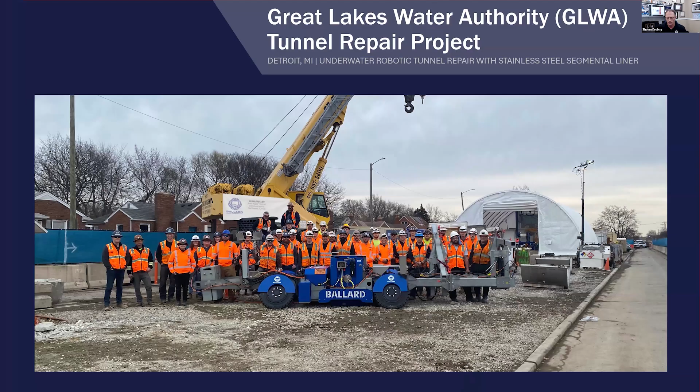So, moving on, this is a picture of the project itself. I'll get into the project a little bit, but just from this picture, you can see the team of divers it takes to run it. The project is actually in Detroit. We did most of it from the median, about 34 feet dimension from curb to curb, and that's where the pipeline runs. This is the team that helped develop BERT and ran it for the very first time.

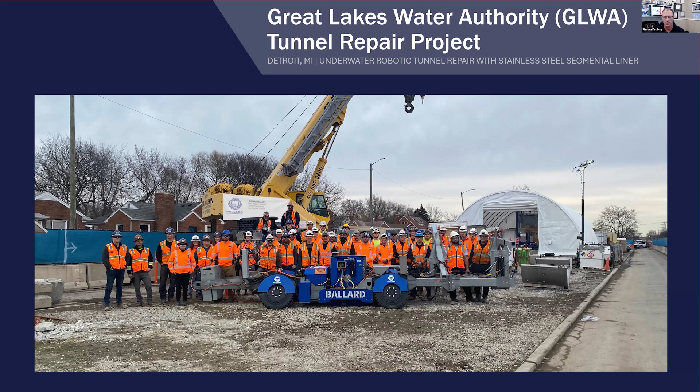Very extensive divers, and their experience is amazing. Working with them through the R&D process, they helped us develop the vehicle, as they would be the ones working with it.

So let's get into the why. The aging infrastructure in the United States is something everyone's aware of. A lot of these things, like the tunnels we're going to talk about today, were built back in the 30s and the 50s. Some of these are seeing complications and challenges, maybe not as bad as the picture on the left, but again, it's how do you fix those things, and how do you do that in a situation where you may not be able to shut it off or bypass it easily.

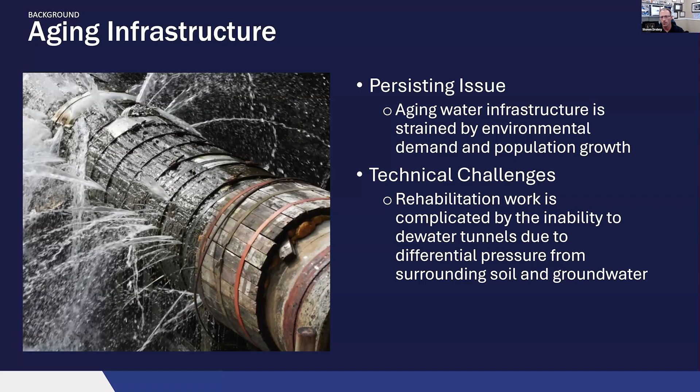That's kind of what this project, how it came about. If you know Detroit, looking to the north, there were actually 3 tunnels in the system that we worked on for this contract. Our designers were Brierley and Schnabel - Schnabel was more on the liner design, Brierley the overall project. There were 3 tunnels; 2 of them got liners, and we did grout injection for crack injection in one of the larger tunnels. That's a little over $90 million, and we're currently in the last year of it.

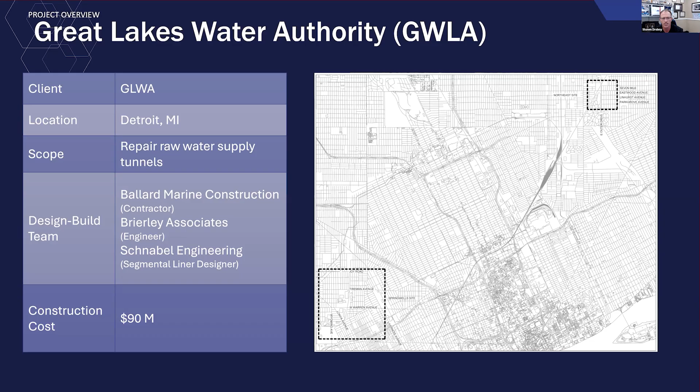So the inspection - how did we get to this project? We first got out there for the inspections. We used divers in 2015, and in 2018 we used divers as well as ROVs to do a full inspection of the whole system, which is in excess of 10 miles for each tunnel. In certain instances we used ROVs, in some instances we used divers. Some of these divers were penetrating over 2,700 feet to do the inspections and gather the data to see what was wrong with the tunnel.

The first tunnel, 12-foot diameter, was built in the 1930s - unreinforced concrete, cast in place, in soft clays that hover just above the hard pan. The second was built in the 1950s, same soils, about 95 feet down, which presented a definite challenge.

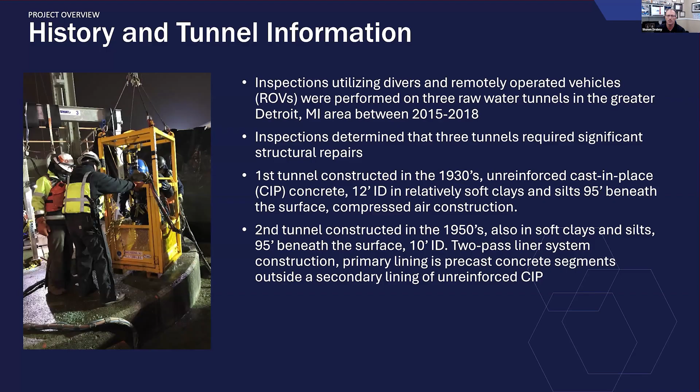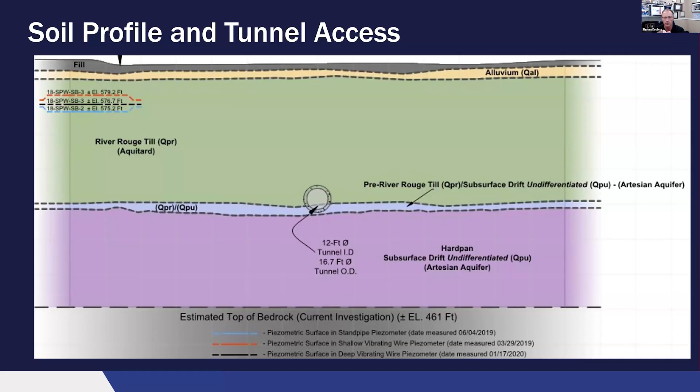Here's a quick view of where the tunnel lies. In profile, it hovers around the hard pan, and this led to a lot of the cracking in the tunnel - that variance in the soils. This is between the River Rouge Till and the hard pan, which is kind of where the tunnel hovers as it goes.

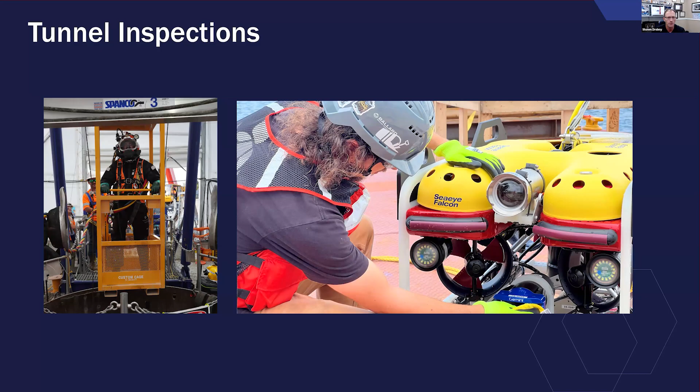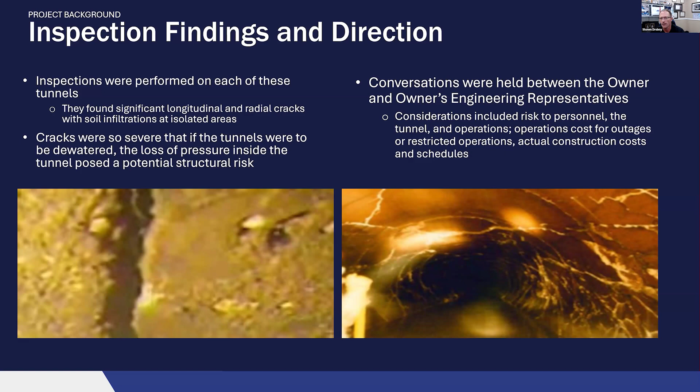The goal for the owner was to allow this tunnel to be dewatered so that traditional repairs could be made. But with this inspection, the fear of dewatering leading to a collapse possibility - they tried to dewater it, but there was too much infiltration or just a pure structural problem with the tunnel itself. That goes back to safety - risk to personnel and the tunnel itself. The entity could not afford to lose a tunnel, since this supplies a majority of the water for the entire Detroit area. You can't take it out of commission because the capacities required are too much, and the fear of collapse is too much.

So what does that bring us to? That brings us to how do we get in there to do these repairs in the areas where the cracking is really bad that we wanted to repair. We sat down with the owner - could we bypass the tunnel? You see the picture above with the pumps, but that wasn't feasible given the capacity of these large tunnels. The pumping requirements would be too much and too costly.

Our proposal was the wet repair—that's eventually what we went with, what we talked the owner into. Coming from the trenchless construction group and the tunneling group, we know the cost of putting in new tunnels, and they weren't too interested in jumping into that market of spending that kind of money to replace these two tunnels. So that's what led to working in the wet, not taking it out of service, and making these repairs in the wet.

We looked at traditional liner plates, galvanized liner plates. Obviously they're light and easy to move, but high bolt count. This is very problematic in the marine diving world because we had limited time as a diver. Depending on how hard they were pumping, the depth of water can range up to 65 feet, which only allows a diver in the water about a little less than 2 hours on nitrox gas. So every bolt counts with the time it would take. In the end, the traditional liner plates would not work because of the design requirement I'll get into in a minute.

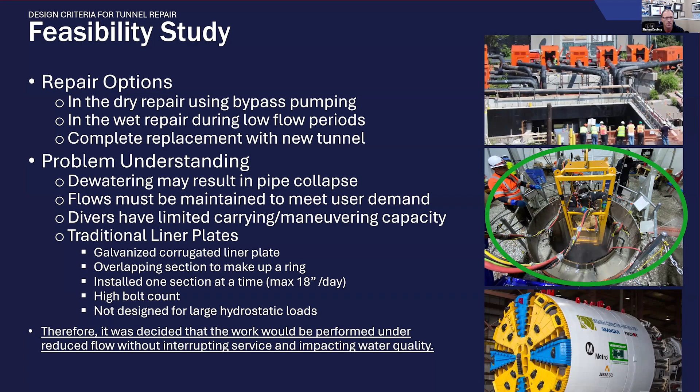The repair was, call it, a structural solution. The liners had to withstand 95 feet of hydrostatic head and a 50-year design life, using 304 stainless steel. When we get into the liners, you'll see this is millions of dollars in custom stainless steel liners that would need to last that 50 years. I have a slide later where we talk about how you do quality control in an environment where you can't send your field engineer down to do it.

The best thing was, we didn't want to take their hydraulic section down. So we went through a lot of iterations of what these tunnel liners would look like, trying to keep that to a very small footprint yet give us enough room for installation. We developed this with a mix of engineers, managers, divers, fabricators—everyone on the R&D team—to come up with both the liners and the vehicle.

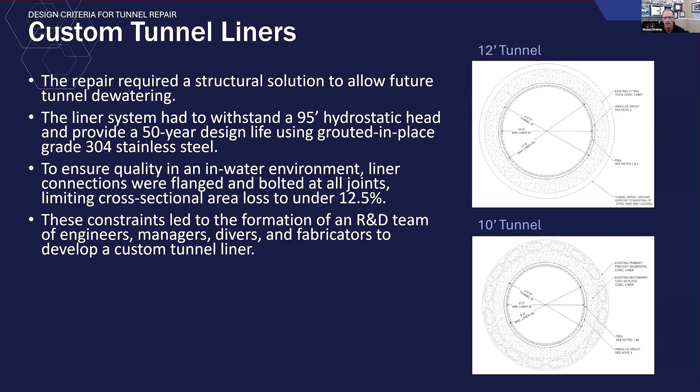The designer did FEM analysis on the tunnel, both the penetration and the liner section. The picture on the right shows the connection between the liner plates and the access shaft—pretty complex stainless steel welding and fabrication there, with the small liners. That's really what they were checking with the analysis, making sure we understood how loads transfer through the liners. That's what the designers were doing.

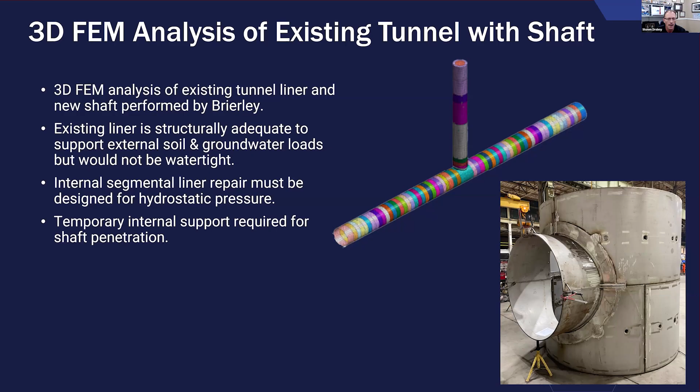So how do you do this? The pipes total 1,200 feet in length. One tunnel was a 500 foot repair, and the other was a 755 foot repair—two different sites. The problem was that those repair sections weren't close to an existing access point.

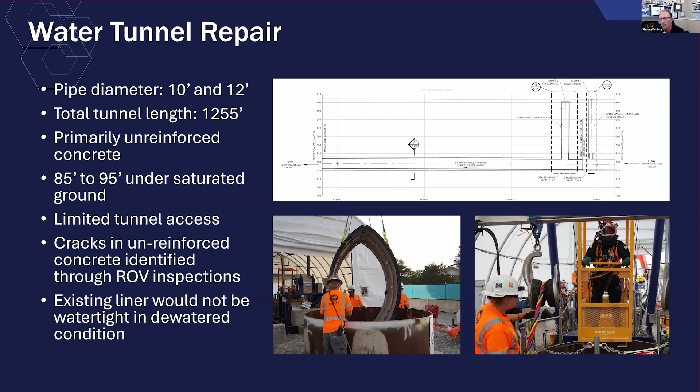So how do we get the tunnel liners down there, and how do we get the diver down there safely? We had to install and drill into the existing tunnel at a location so we could service the work effectively. If the divers had to penetrate 1,800 feet or whatever it was to reach the repair section, they'd have limited time for the actual repair. So it was decided we would tap into the tunnels, which had been done before, but it's a risky part of the project. It was required that the divers have their own smaller access shaft, and a larger access shaft just for materials and the vehicle itself.

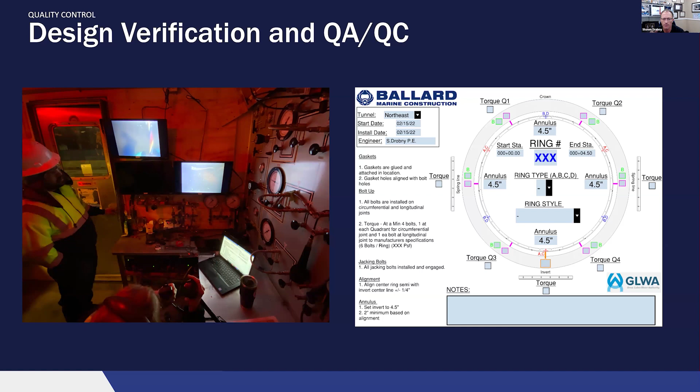I slipped this in for quality control—if you're not familiar with the diving world, the field engineers sit in dive control going through this with the diver, taking pictures, using video communications, and a checklist for every single liner plate we installed: the gaps, the annulus measurements at different locations, the bolt count, and the torque requirement on all the bolts. This is the QC sheet we used to verify quality control was being done and assure the owner that it was happening.

So let's get into the project. This is kind of the riskier part, and something that piqued my interest was how do we get into the tunnel and how did we do it?

Then basically the last part of it was diver access. We were able to get the divers in. We came up with a digging shield, kind of like any kind of shoring. The last 5 to 8 feet or so was hand excavated by the divers, and as they did that, the shield would follow the casing until they reached the top of the tunnel, giving them protection from the outside.

Once we cleaned that entire thing off, we poured a leveling slab that followed the crown but leveled it up so the drilling contractor would have a nice flat place to start coring. We put a form up, cast that, and tied it into the casing itself, making a very good, strong connection between the casing and that concrete seal pour. That basically created a template for the driller to land his core barrel inside and then core through the tunnel.

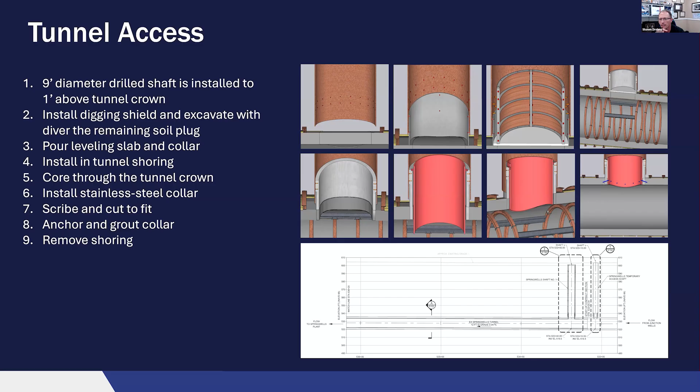Then to transfer the loads through it, we put down a 1.5 inch stainless steel collar. You can see it has tabs where it was able to land on that concrete, and then we had the diver scribe it, pull it back out, and cut it to fit. Once we did that, we had pre-placed bevel washers on all the sides where we were able to anchor that into the actual tunnel crown. Then we grouted the annulus between that, and that was a good structural connection, allowing us to remove the internal shoring and start the project.

Again, Brierley did the design on the liners. We started off, obviously, when you're using that kind of linear footage, every pound counts for every liner. So we actually started with a 3/4 inch skin because of the loading, but we were able to add some stiffeners. We used 3.5 inch by 1/2 inch angle as the flange connections, and so we were able to get that skin down to a more manageable, I think it was 1/4 inch, which definitely took our weight way down. But again, those are the custom liners made.

Now, if you're not familiar with stainless steel welding, you can get a lot of temperature variations when you're doing that. And obviously there was a lot of weld required because of the internal stiffeners and just making sure that was all tight.

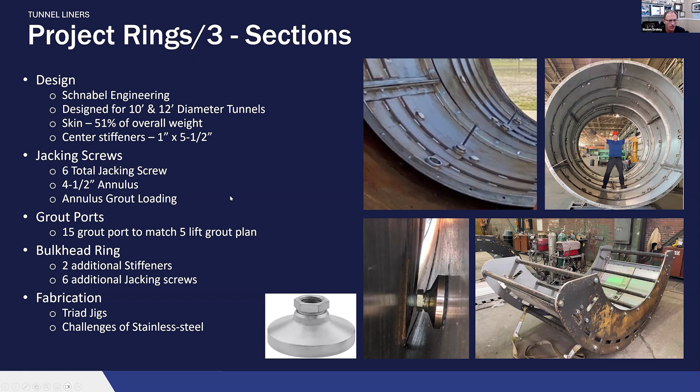So that was working with the fabricator, doing a lot of that stainless steel stuff. But I think the key to this project was the owner allowing us to do a mock-up.

We mocked this up for about 3 weeks. We used the divers, the dive supervisors, and the engineers, and we met for 3 weeks on how do we install these, how do we get with the access that we have, how do we get this done.

One of the key things that came out of that is what this picture shows, what we call the football method, which is actually part of our patent. That football comes down, it opens up, and then we add the third piece, and then we bolt those rings up. But this mock-up was key to finding out what the bolt sequence would be so that we weren't under suspended load, and having only 4.5 inches of room around the whole thing, having enough play to actually open up the ring and assemble it.

The mock-up was the key to our success in this project, developing not only the liner installation but the vehicle itself and figuring out how we were going to do it.

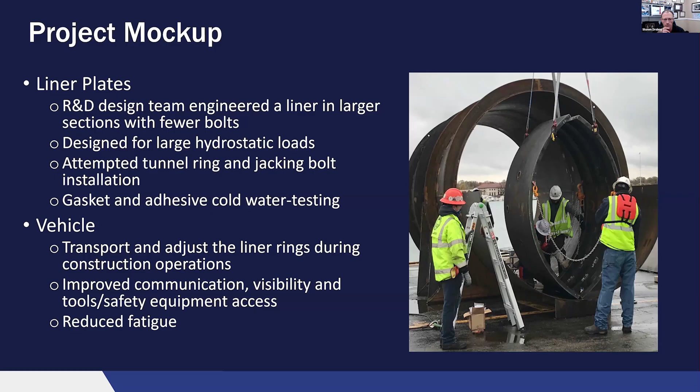So now we got the rings. We understand how heavy they're going to be, 4,000 pounds a piece. We wanted to get production, we wanted to get 2 rings. So how did we do that?

We put together, with the help of the Traylor Underground Division and Kelly Engineering, concepts that started with simple ideas. They went from simple to a lot more complex, from simply putting on a roller system and rolling it down the tunnel, which gave you no stability and no ability to control the rings, but we thought we could get it down there.

Traditional methods of doing this were just putting lift bags underneath the liners and moving them by hand with divers, which is very time consuming and not very safe, and moving traditional liner plates versus something that's 4,000 pounds is significantly different, requiring a lot bigger lift bag. So this is kind of where we went with it.

So then we kind of said, hey, we got an ROV division of the company, and we worked with some overseas designers, and Kelly Engineered Equipment is who built BURT. But working on these first initial concepts, we said, hey, what if we powered the vehicle? What if we went from a cart, something that's just going to be moved by hand, to something that actually has a hydraulic unit on it that can move it hydraulically so that we don't have to crank it.

So we kind of started with some initial designs. And then as we worked our way through, it definitely started improving and got to a point where it was a very full design of what BURT is today.

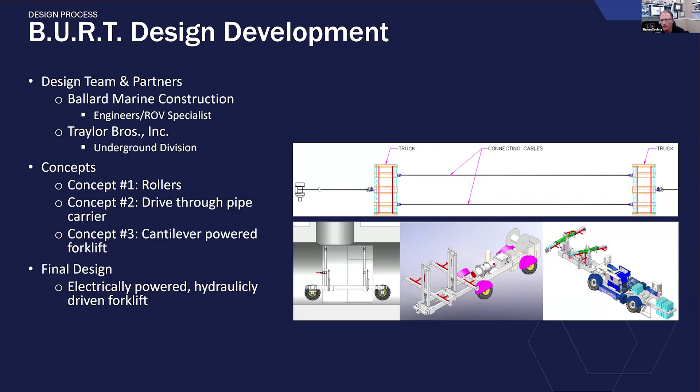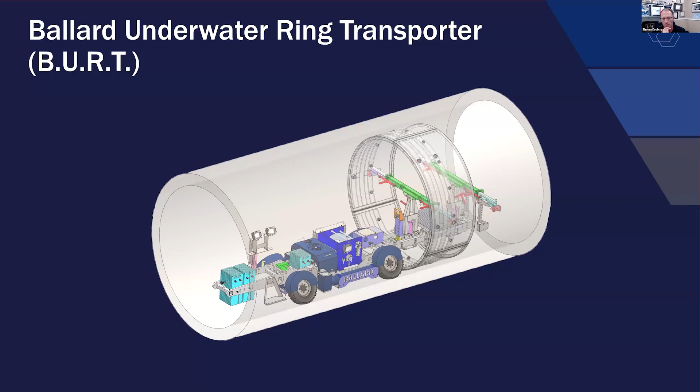So this is kind of what it looks like in the tunnel. You can kind of see the liner. This is how the vehicle attaches to the rings, using those same jacking ports. It can actually hold 2 rings at a time, and it has the capacity with the counterweights on it to cantilever 2 rings at a time, which is about 9,000 pounds. So this is kind of what the vehicle looks like. You can see the taper to the wheels to fit the tunnel and run in it.

So let's get into the details of what happened in the end, when we found that we were developing a new technology, and that this could be something huge for the company moving forward. We started early on in the patent process, and if you've never been through this, it takes way longer than you would think. But again, looking through what was already out there, we were in a league of our own as far as the patent itself.

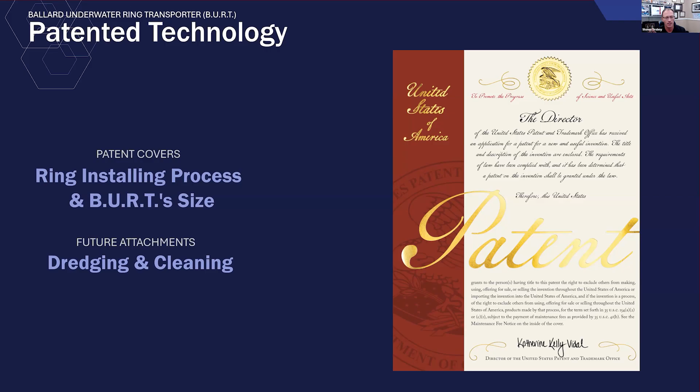So we were able to get a very broad patent on the vehicle, as well as the ring installation process itself. That led to the patent, which was pretty exciting. Our patent actually covers some future attachments that we haven't even created yet, as far as tunnel dredging and tunnel cleaning attachments, and we'll get into that as well.

So how does it work? BURT breaks down into 6 major components. We knew we weren't going to be able to get a 25-foot long vehicle down the tunnel like we wanted, not in one piece. So it breaks down into these big segments, and then basically it goes down. You put the main body first, you connect the tail section and the operator station, and then the arm sections and everything go down together. It can fit down a 7-foot diameter shaft relatively easily.

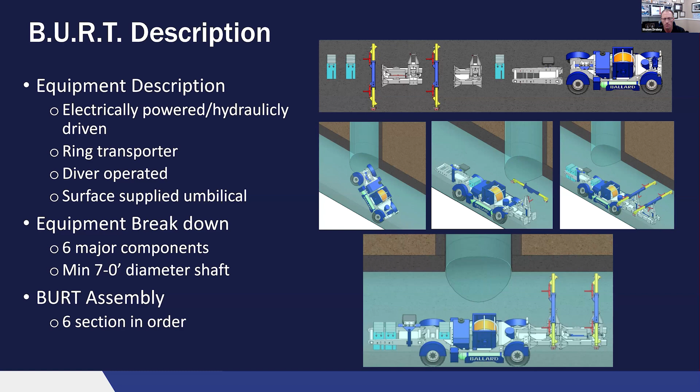When we first started designing this and going through it, we thought this process could take a week to assemble. And obviously the first couple of times it was quite extensive, but today, in year 3 or whatever of the project, we assemble this thing in a shift. It goes down, assembled, ready to go in a shift, which is about 9 hours, and it's fully ready to go. That changed our design too - we first started off with a lot of hydraulic quick disconnects so we could change stuff underwater. In the end, if we have a problem, we just take it out in the shift, repair it, and put it back the next day. That worked out really, really well.

One thing to consider when working in a tunnel is that the owner was not going to be able to shut off water necessarily, because of their water requirements. Our dive season is from October 1st to May 1st, give or take, because they're able to supply enough water and shut it down in maybe a 10-hour window at night, which is when we were working. But even then they would keep one pump on, so there'd definitely be flow in there - there is constantly flow. So we wanted to know what the situation would be. The divers, we don't like to see over 2 feet per second. It gets cumbersome to work in, and not safe.

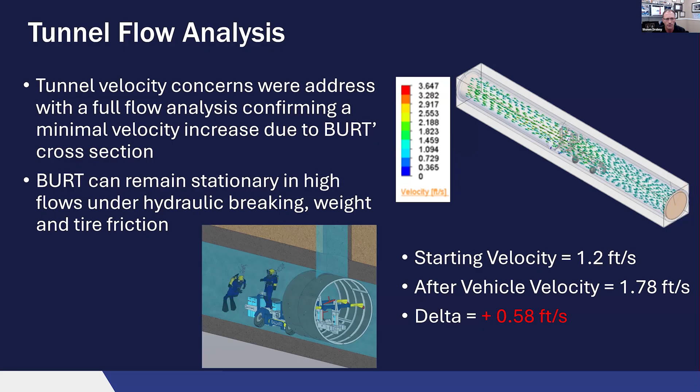So we did some flow analysis and figured out that it had a very minor delta and change, although it looked like it was taking up a lot of the cross section. We had a very small change in velocity through the liners because of the vehicle. Now, the divers will tell you that they definitely can feel the difference when they're inside the liners versus outside the liners before the vehicle. But again, it definitely is holding true to this flow analysis.

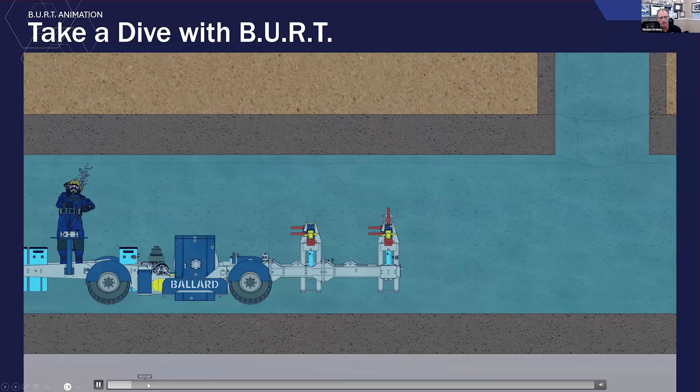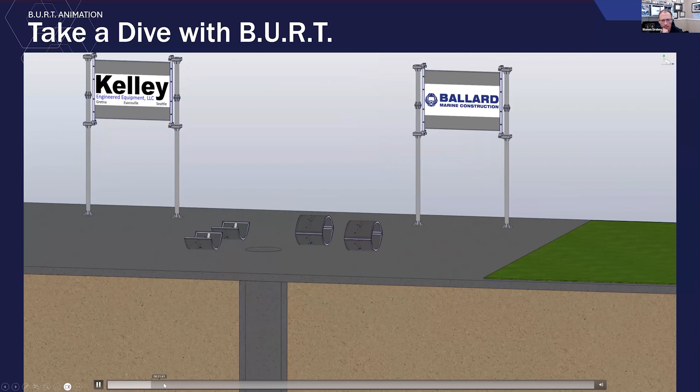This is kind of a video. It depicts the stages. It's kind of a long video, so I'm going to walk through the steps here. But again, this is the overall project. You've got your shaft. Our water head was about 65 feet. Essentially, the first thing to come down is actually the football section that's lowered down by the crane.

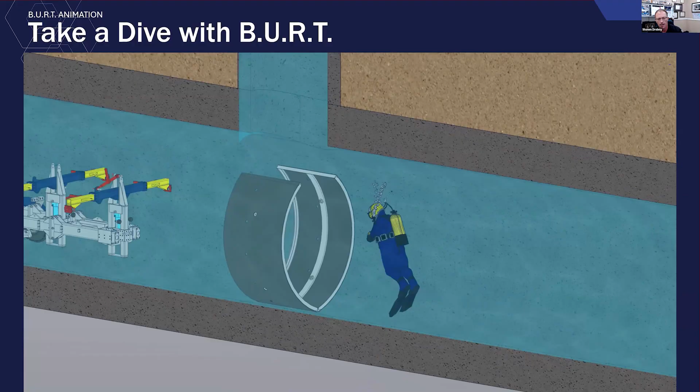And again, it's all about the rigging and how that works. And then it comes down and lands and then kind of opens up into what we call the football method. So it opens. Now you have room above you for the divers to work, but it kind of opens up.

And then again, we repeat the process with the third liner. The third liner does have to be landed and then re-rigged and then brought up into location. So it lands, the crane re-rigs, we bring it back up, and then we use come-alongs to bring it back together, land it, and we make those 4 initial outside bolts to make up the initial ring.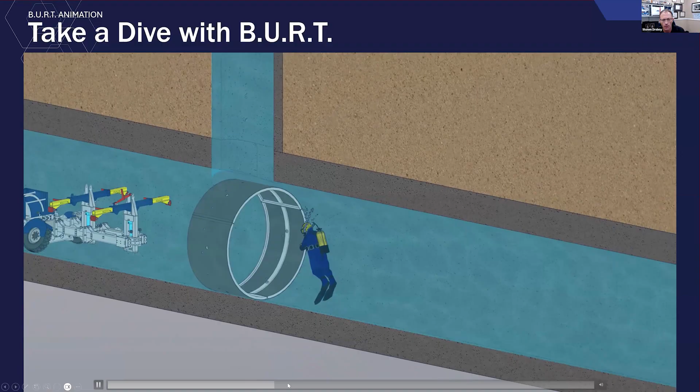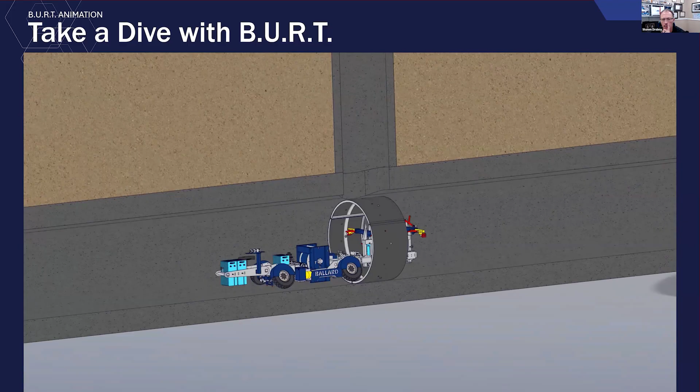And once that's done, the vehicle comes in and it actually goes to the first section, ring 1, and it will attach via those jacking bolts with those jacking inserts. And it basically attaches there. And those same 3/4 inch screws is what attaches the ring.

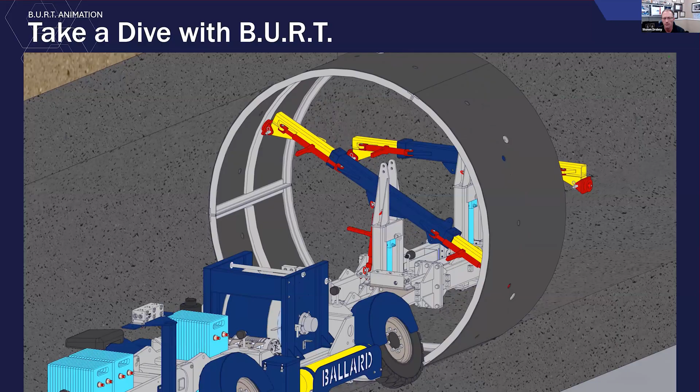Now, this first ring, because we wanted the joints to be opposite of each other, this first arm can rotate 60 degrees out and attaches and then spins the ring to a level position by keeping the ratchet attached and making the hydraulics able to rotate it just by coming up on it. And so it rotates it into position.

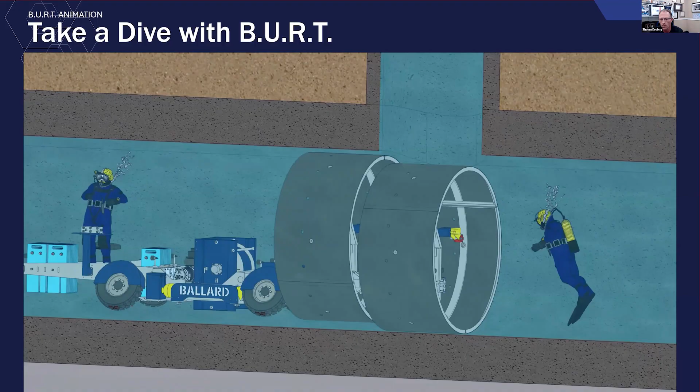The divers then drive the vehicle back and move it out of the way. This second section, the front section, can actually move, so you have separation between the rings. The same process happens, except for this one's on the normal. And so now you have an A ring and a B ring, and the joints are, like I said, 120 degrees separation, they said, for design strength and that type of thing.

So again, it raises, it again connects, it brings that together. That's the most time consuming thing, is doing the circumferential joint bolts and bolting all that up. But once that's complete, we now have 9 feet of completed ring that the divers basically drive the vehicle down and install it and work our way out. And so by using the vehicle, we're able to control that entire 9 feet up, down, left, right, until we mate it up, kind of like mating up a space shuttle.

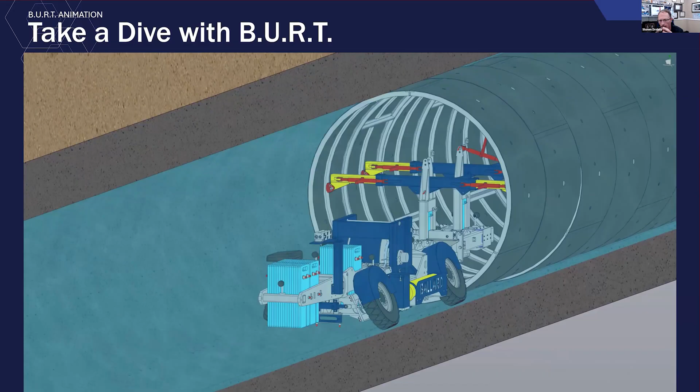You made up that joint, that flange, and then that bolts up, engage the jacking bolts, and that's kind of the sequence. You can kind of see the ratchets that bring it in and out. We wanted some fine control for that, as well as the rotation, so that we could see if it was binding up, and that's why we did not make that hydraulic. So that's kind of the process.

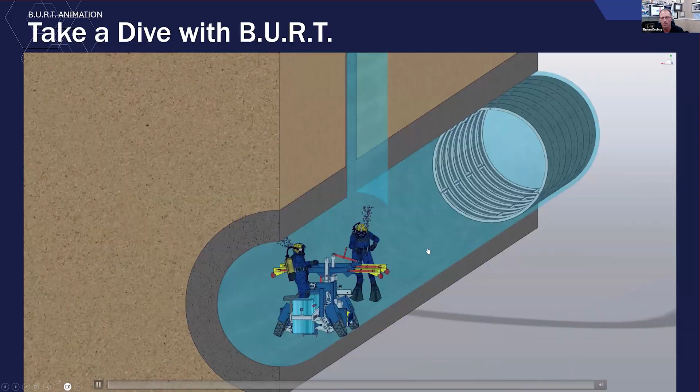So what are the controls? Basically, it can move up, forward, back. The divers have control of the reel that actually has the umbilical on it, and as well as we've added stuff now that we can control hydraulic stuff on the front of it, kind of like a skid steer. But again, that's kind of how it works.

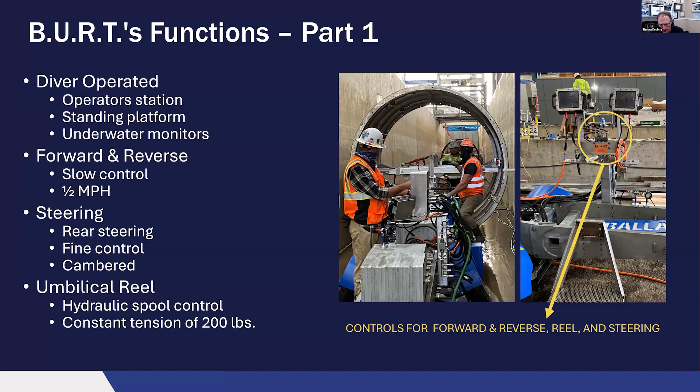It has rear steering like a forklift. Again, because the vehicle is 25 feet long, minor steering adjustments at the back is a big transition at the front. So again, we wanted very fine controls and be able to move very incrementally, especially coming up and matching up to the rings. That spool that's on the vehicle actually keeps a 200-pound tension on the umbilical, so it's always tight and always winding correctly, so you don't get any spidering or anything like that.

The heart of the vehicle itself is an underwater HPU unit. It's 480 volt, 3-phase, 900 volts out to the vehicle. It provides, we run it typically around 3,000 PSI, which is more than enough to control the vehicle. This came from a large ROV builder, deep sea ROV builder. Obviously, it's not a traditional HPU unit, as this is a completely sealed system, which definitely has its own benefits and downsides to it that we'll get into.

But the vehicle itself, fully intact, is about 20,000 pounds. So it's basically a tank. It was about a telehandler, you could say. So it's very heavy, but again, it has its four-wheel drive. Each of the drive motors, with 9,000 pounds of ring on it, something like that, this thing is almost unstoppable as far as its power. And although slow, it basically can creep along even in flow and current and stuff like that with rings on it.

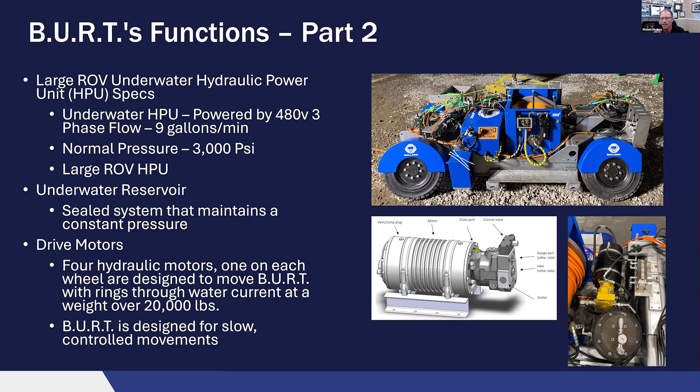This vehicle, when we started, could do 2 or 3 miles an hour, but that's not what we wanted. We wanted the divers to go slow to avoid issues, so we actually turned the HPU down in pressure, giving us more capacity than we need. We had to slow it down, and about a half mile per hour is what it rolls, as you'll see in the video.

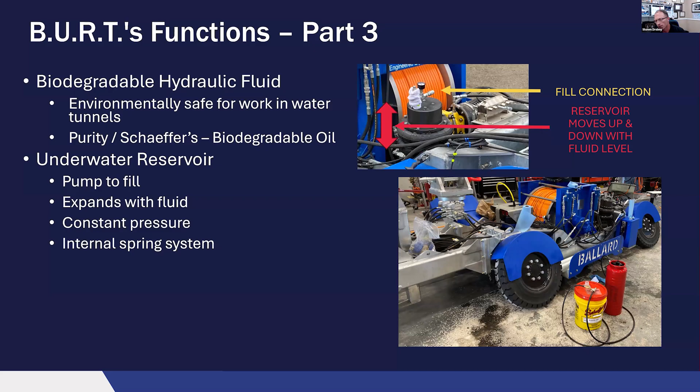Another question you might have is we were working in what was raw water, but they were holding us to drinkable water standards, NSF61. So how do you do that with a hydraulic system? We had to work with suppliers on purities, using Schaeffer's bio oils, and getting the same performance across temperatures from 33 to 60 degrees throughout the dive season. We danced back and forth between Schaeffer's and Purity oils.

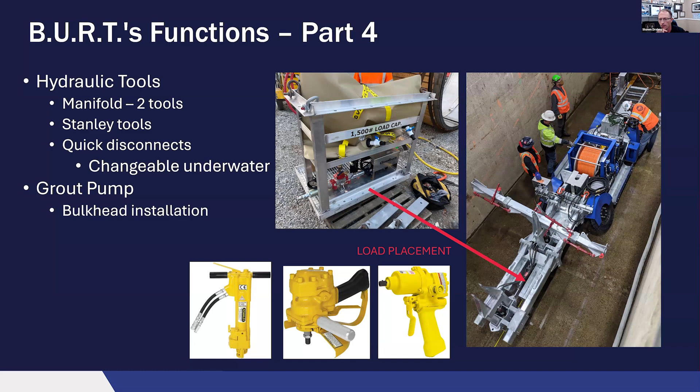Another cool innovation we were happy about is this is basically like a skid steer. The front has 2 hydraulic cylinders as well as 2 control cylinders, and we're able to run all of our Stanley hydraulic equipment off that. That was a huge innovation, since we thought we'd be doing all these bolts by hand - there's 36 in the circumferential joints alone. But as you can see in the bottom right picture, we're actually using impacts. Once they're hand threaded - stainless bolts can gall otherwise - the divers use their hydraulic impacts to put these bolts home, which definitely increased our production.

Some other cool innovations with this vehicle: we thought of it more as the Cadillac stuff, but it actually became an integral part of the system. It has 2 cameras, one forward and one aft, shown on 2 underwater monitors I'll show you in a minute. It also has 8 individual lights around the vehicle and key component parts so we can light it up. As you know if you've dove, when water's really clear lights are fine, but at 6-inch visibility, light can actually hurt you.

The other thing we found is in a stainless steel environment, the light refracts off the stainless and can get very cumbersome. So working with the DFC company, we were able to individually change the dimness of the lights from the surface. The field engineer can adjust those lights, and we can also preset lighting sequences for different operations - ring construction, driving forward, driving back - and change those. That was kind of cool.

All of that goes through a slip ring. If you don't know what a slip ring is, it allows all those connections - power, video, serial - to rotate on a disc and transfer into the reel up on the top right. Then you have the control cabinet on the bottom right that holds all the power requirements. The HPU, the lighting, and the cameras are on separate circuits, so if one were to go bad, we still have the others.

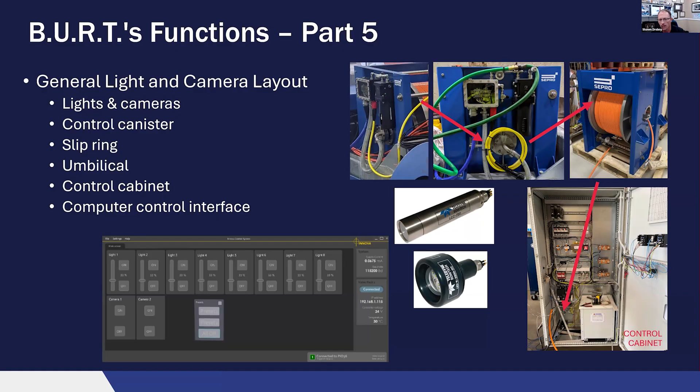Again, a lot of safety things were put in there. So how does the vehicle work? You have to put yourself in the environment these individuals work in. In the tunnels, this footage is from testing so it's nice and clear, but in the actual tunnels we're diving from October to May, temperatures are typically 33 degrees and a little above - freezing type water. Visibility can range from 6 feet down to commonly 6-inch visibility. So how do you drive a vehicle when you can't see it?

That's where these underwater monitors came into it. The forward-looking camera faces down, uses the joint of the ring, and we pre-placed a yellow centerline cable down the tunnel so we could use that for navigation. From the rear camera you can see the umbilical of the vehicle, which is only 3/4 inch and everything goes through it, which is fascinating to me. So basically the diver puts on their mask, watches those two underwater monitors, and that's how he holds the centerline and drives the vehicle.

This wasn't something we thought we'd be using a lot, but in reality it became almost essential for us to navigate the vehicle in these kinds of conditions.

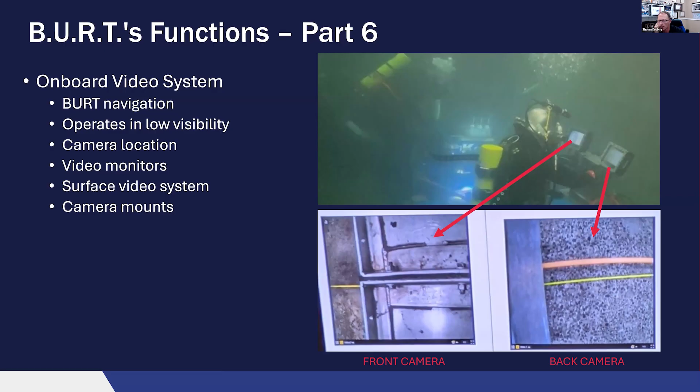So from start to finish, from a first pencil drawing to the vehicle fully fabricated and completed, was 10 months, which is astonishing to me, and I think to most people I talk to.

So 10 months, and then we had to find a place. How do we test an underwater vehicle, and where? I searched all over the country for places to test it. In the end, testing it in a river or on a boat ramp wasn't feasible due to the weights and stuff like that. We also needed the ability to put a crane in to lift this vehicle and put it into the channel itself.

I ended up coming upon the Hinsdale Wave Lab at Oregon State University, which was perfect. It's basically 12 foot wide, 15 feet deep, 324 feet long. There's only one other channel in the US that's bigger, and it's only by a couple of feet. But again, this provided us the perfect place to test the vehicle.

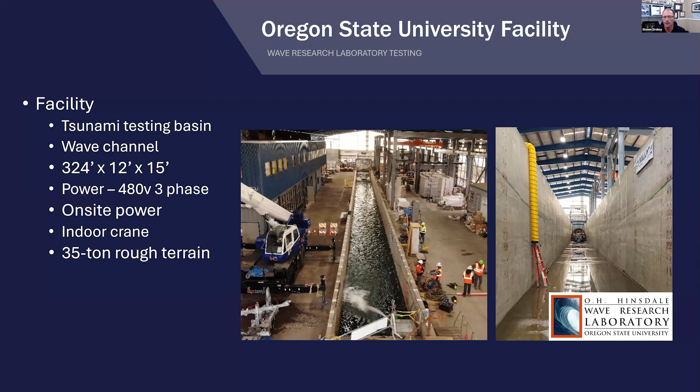Not only did they have shore power, but we were able to sneak in a 35-ton crane into the facility in order to lift the vehicle and safely test it.

We used divers who would actually be in the water doing this, because they would be the ones in the environment, and they also had great ideas about what they were going to need in that environment.

We designed an HPU that goes on the back to provide power, because the actual HPU is only designed for being submerged in water to cool it, and it overheats in about 5 minutes. So we had an HPU that would do it, but we didn't get the same flow rates. In the end, we came up with a sophisticated design of running a constant garden hose over the unit to cool it, which let us eliminate the noise and the smoke, and we ran the vehicle under its own power.

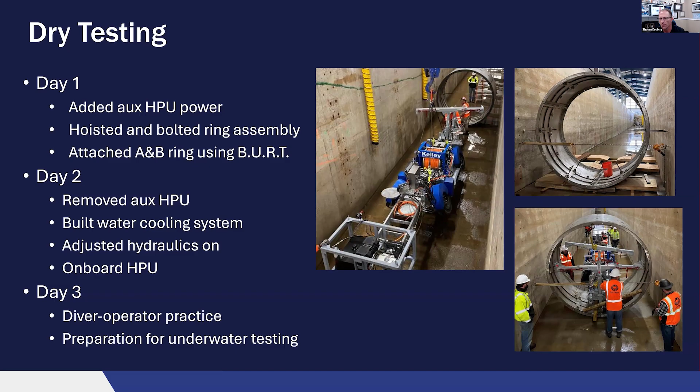The divers practiced, and we recorded what things we needed to fix, what needed more play in it, and basically honed in on the dry testing of it. Once everyone was comfortable with that, that's when it came to testing it in the water.

Obviously, before you get this unknown vehicle in the water with divers, with this power, and all those things we had to deal with, we ran through all the safety checks, checked for leaks, checked the electrical systems, made sure everything was tight, and really honed in on getting to its first dive.

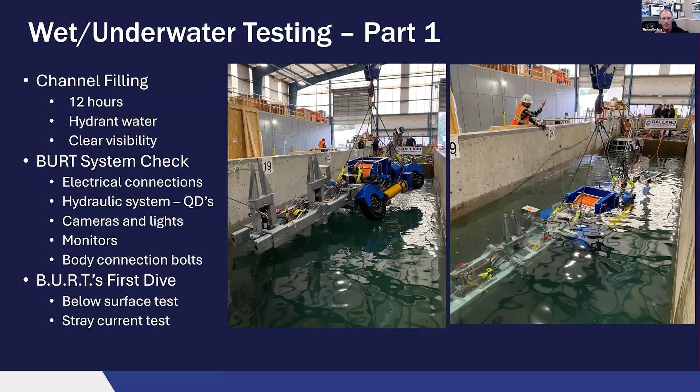So we first lowered it to the bottom of the channel. The channel fills in about 12 hours, which was pretty cool, with hydrant water so we could work in pure, clear, chlorinated water. You can kind of see the pictures from above; we were able to see a lot of it and work with it.

One of the scariest parts of my career was, like I said, asking a diver to get into this with this vehicle for the very first time, with this voltage, in fresh water, with all these things. So we did a lot of checks. We had a lot of stray current detectors on the surface to see if there was any detectable stray current.

There wasn't. So we turned the vehicle on by itself and ran a lot of system checks before the diver would get in the water. We were able to actually run some of the hydraulics and stuff like that from the surface, just by pushing the valves, making sure everything was working correctly before the first diver got in the water. But again, that first diver gave you a thumbs up.

We have a very sophisticated system. It basically has a very complex GFCI, which sends a DC current through the system.

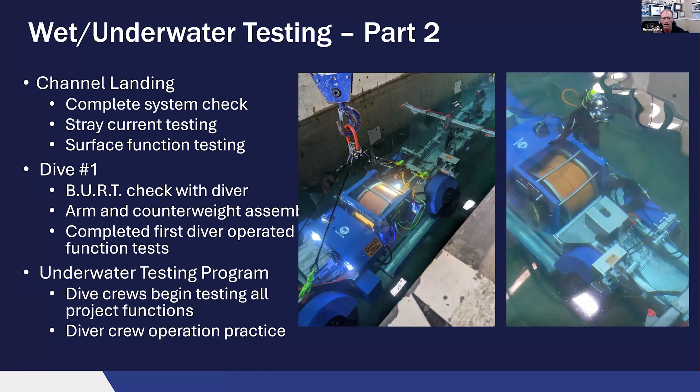If it doesn't get that back in milliseconds, it's cutting off the power. That's what is typically used in your high-powered ROVs, and that's what's on this system as well.

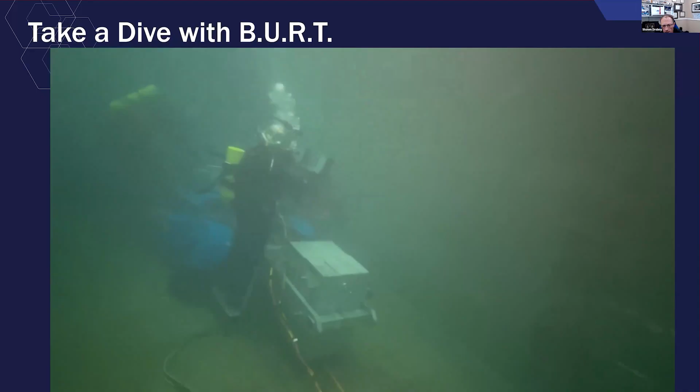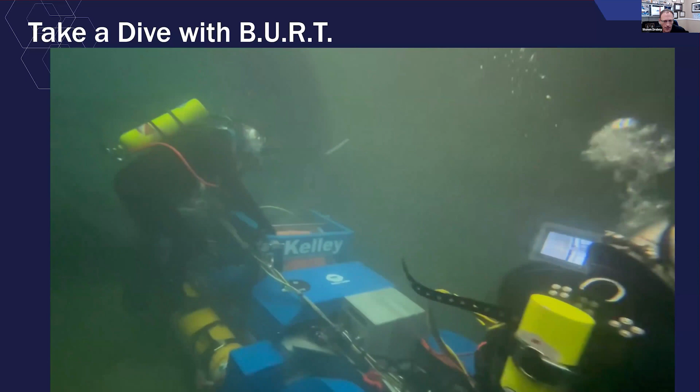Here's a video of the end result, testing underwater. You can see the divers' umbilicals, which we had to watch out for—that's their breathing air and communications, so you manage those hoses so you don't run them over. You can see the diver putting his head on that screen, not even looking left or right, just navigating the center line.

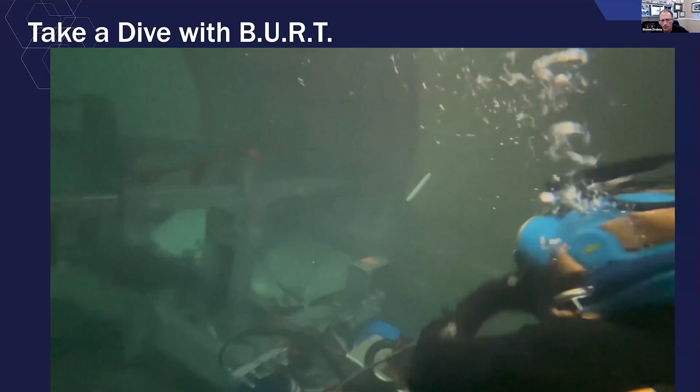The second diver gets a free ride and just manages and watches the reel, making sure nothing else is happening. He's basically standing on the emergency air tanks—that's a bailout on his back for emergency air. But again, we had those side tanks as well.

This gives a good interpretation of how this goes down the tunnel. This is two rings connected together. You can see the gasket material in between the joints to seal it up, and then the arms holding those two sections and moving down the tunnel.

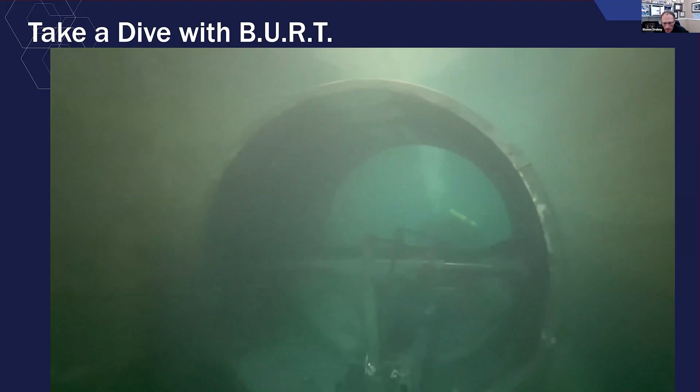Moving around a half mile per hour, we definitely increased our production way past what we thought possible, so that was pretty exciting. To have something new work that well and not have any major issues was quite exciting.

We thought we'd have to pivot, but in the end it was very small fixes—safety adds, like putting a handle for the diver to hold onto. We had a couple of design fixes, but other than that it flawlessly went through its testing, which was pretty amazing.

Some things we needed to work out: how are the divers going to communicate, how will they manage their umbilicals, and where will they go so they don't get tied up in the vehicle? Traditionally divers work alone and don't need to talk to each other, but for this project we knew these two divers would both be working divers.

For safety and production, having them talk together instead of to the dive supervisor was essential. That's why we did round robin communications on the project, so the divers could talk to each other—'hey, give me the wrench,' 'hey, you get the bolts.' That was a key differentiator to our success.

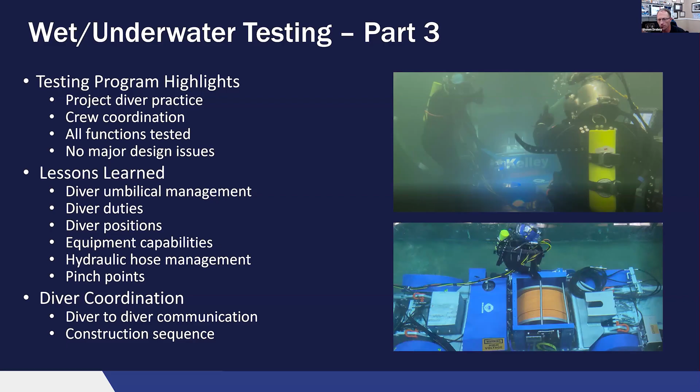It required a lot of diver coordination—who's doing what, diver one's driving, diver two's doing this. We figured that entire sequencing out and wrote down our final sequence.

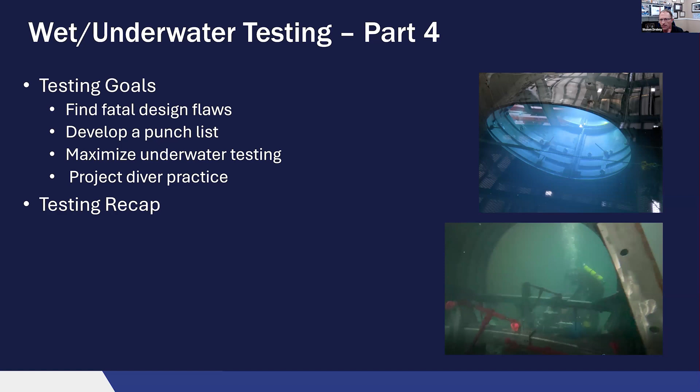We did some punch lists and testing, running the divers as much as we could in those 3 weeks, as many times down the tunnel as possible, to make sure everyone was on board. So now comes the project deployment—this is where the rubber meets the road.

The first time B.U.R.T. would go down the shaft—how would it fit? Would it fit like we wanted it to? We couldn't mimic that beforehand.

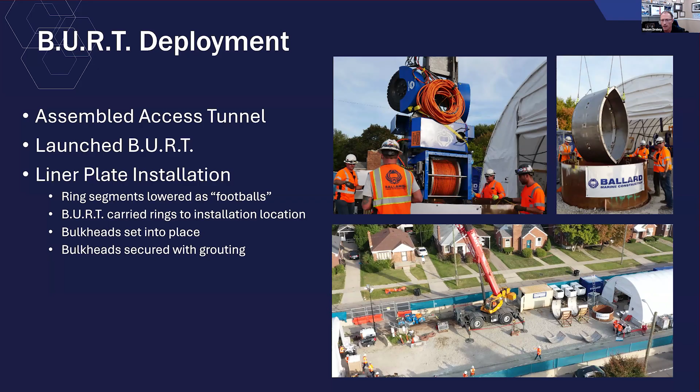We had a lot of success with our method of putting the football down first and doing the ring assembly, really figuring that out. Our production was pretty slow at the beginning, but in the end we got substantial production once we figured out all the ins and outs of the installation.

To date, we've finished one tunnel—500 feet, installed, grouted, and done. The second tunnel, the larger one with a 12-foot inner diameter, is about 24% complete. We're going to finish it this year when we start diving again in October, completing and grouting it in this season.

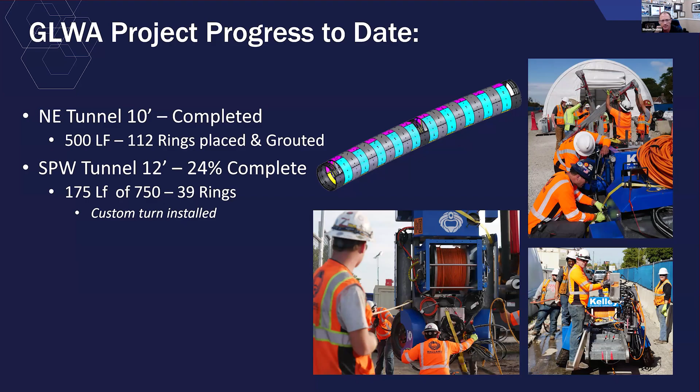We've seen production of up to 4+ rings a day, which is pretty exciting, especially as you work towards your access and your production goes up.

One neat design challenge for this larger tunnel was that the actual start of the tunnel is in a turn. We had to customize some rings, chamfering them down to fit, because what the design gave us and what the turn actually was were two different things.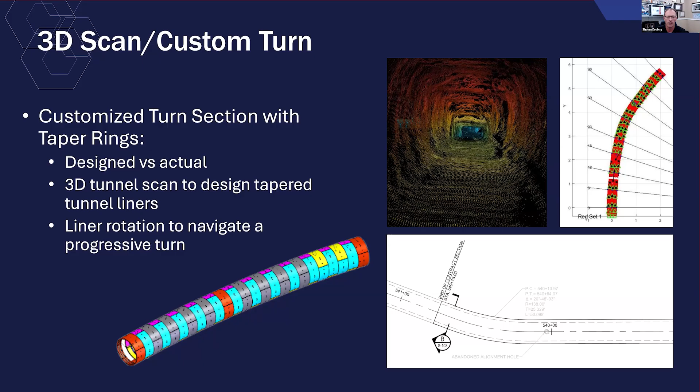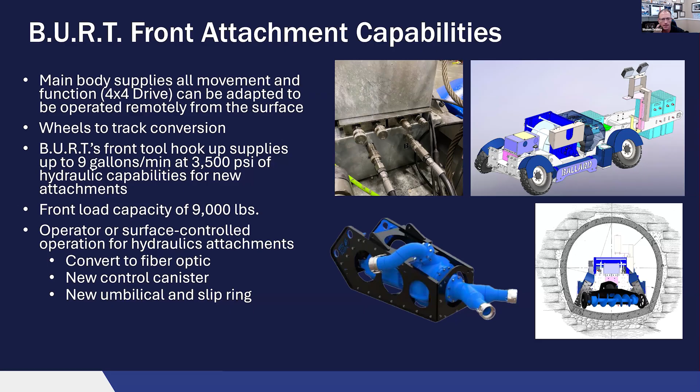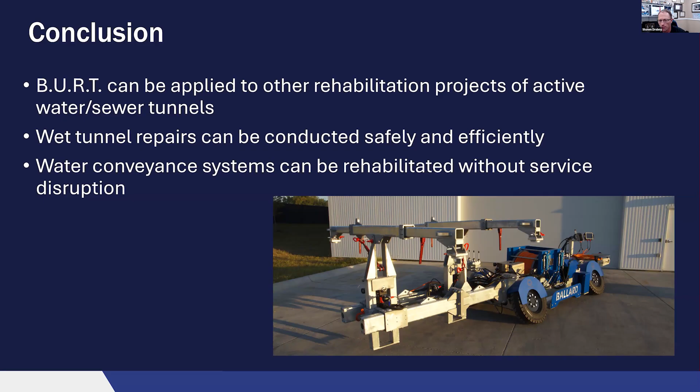So that's pretty exciting. In conclusion, B.U.R.T. can be applied to other rehabilitation projects on active water and sewer tunnels. Wet tunnel repairs can be conducted safely and efficiently. This is the name of the game - we were able to provide a service without taking their tunnel out of service, repairing it from within. Doing it without disruption to their service was key for the owner, and that's where the exciting patent part of this comes in, along with future business ventures. With that, I'll leave it to questions.

Can you please elaborate on the need for grout lifts? Is wet grout heavier than cured grout?

Hopefully I'm not muted here. The grouting - I could probably do a whole presentation on the grouting itself. We used an Amix plant that would deliver something like 5 cubic yards an hour. We went to a designer and had them help us develop the grout, with temperatures ranging from 60 down to 33 degrees. They developed the grout, but in the end their mix wouldn't even mix in our plant - we just didn't get the flowability. Our mix consists of bentonite, cement, water, and two admixtures - a high range water reducer and an anti-washout admixture. The anti-washout was key to keeping the grout stable. We kept working for weeks, making batches and making a lot of mess, and in the end we developed a mix where temperature didn't really affect it much. Its flowability was amazing - we now know we can flow this thing 100 feet plus without any issues.